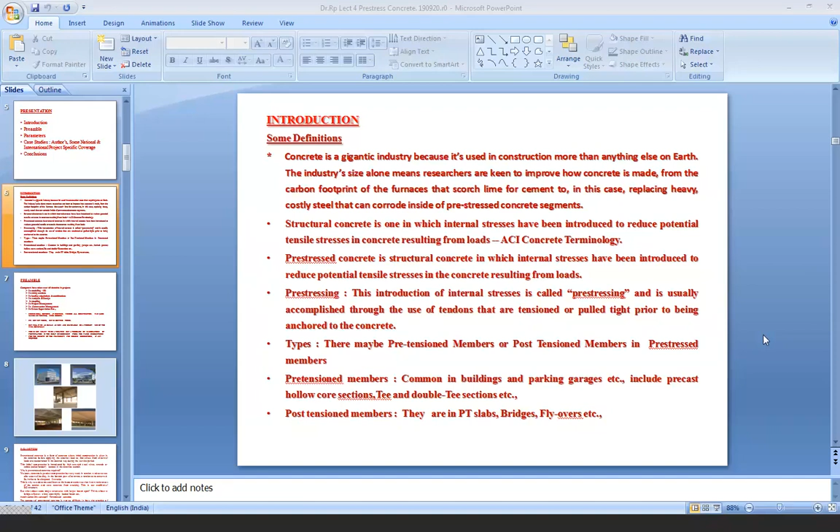Dr. Ramprakash, could you please expand your slide to full screen? Yeah, I tried that. The way it happened is... Sir, please press F5, sir. I know that. Yeah, okay, sorry. I think it's coming on now. Yes, sir.

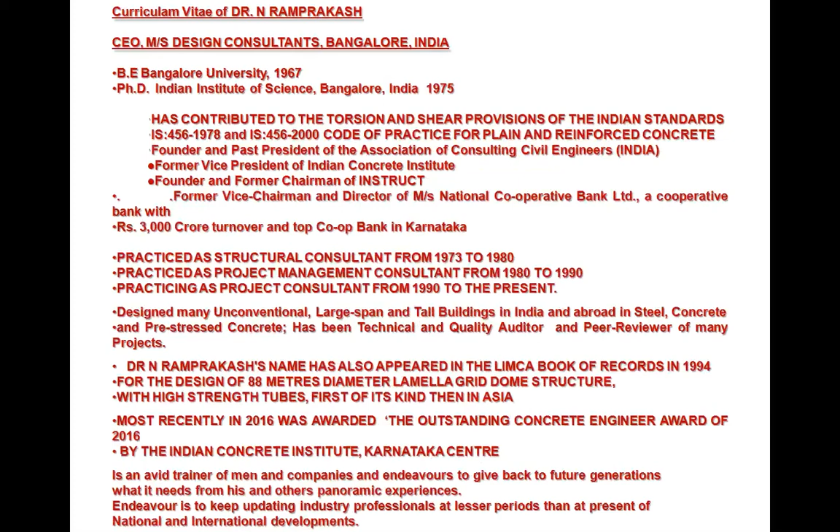Prestressing is an introduction of the internal stresses. The introduction of the internal stresses is called prestressing, and is usually accomplished through the use of tendons that are tensioned or pulled tight prior to being anchored to the concrete.

Different types are there - there may be pre-tension members or post-tension members in prestressed members. Pre-tension members are common in buildings, parking garages, etc., and include precast hollow core sections, T and double T sections, among the pre-tensioned members. In the post-tension members, they are in PT slabs, bridges, flyovers, etc.

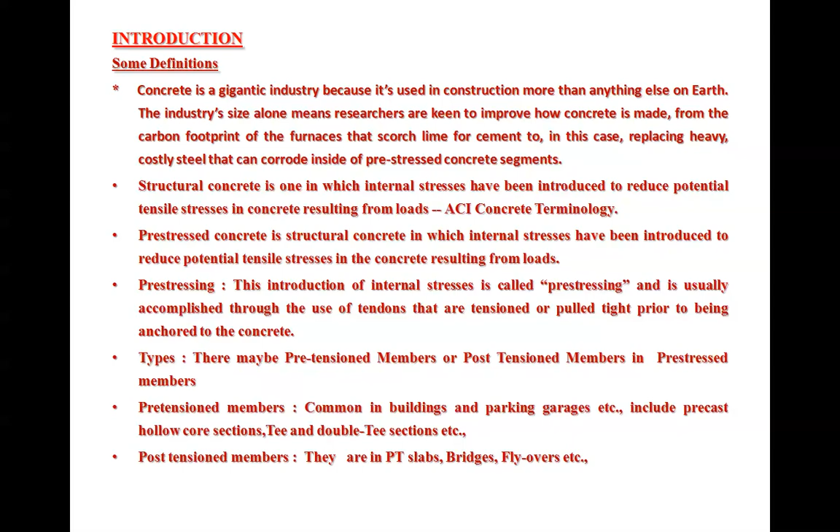I would like to put a preamble to today's presentation. You might have heard this before from me, but I want to repeat it for the new participants today. Computers have taken over domains in projects - in modeling, 3D, in sizing sections, in loading stipulations and combinations, in analysis and design, in detailing, in project management, in construction management, in drone supervision, etc.

I was seeing skill deficits at one time continuously, then wished that all construction was like maybe 3D printing with robots. So this is when I started practice. I was wondering why, because I started off with 3D analysis and design right from the first day I started practice, because I thought all structures are 3D, whether you like it or not. So then I was wondering why the execution is not what can be in a computer.

So, but right now it's not yet there, but it's getting there. So, will it be as human as now and enjoyable, or a product mix of the two, hopefully? Once you have drones and robots, I don't know whether it will be as enjoyable, but it's left to us to make it enjoyable by our creations.

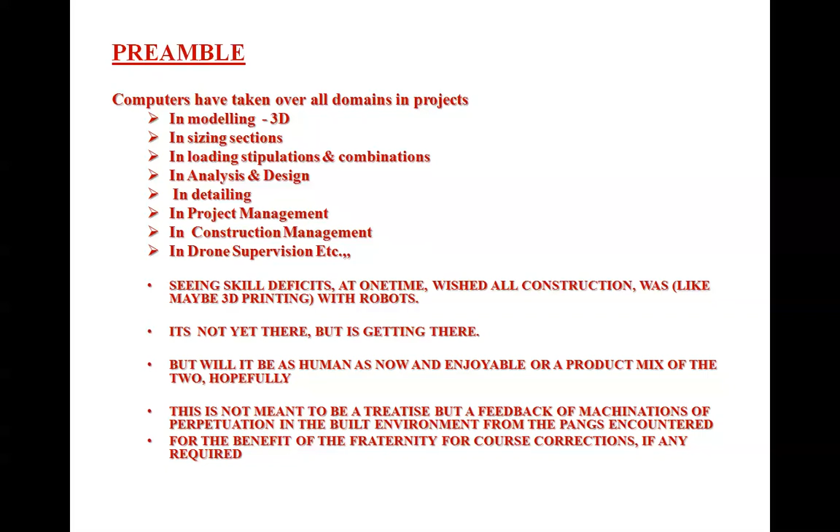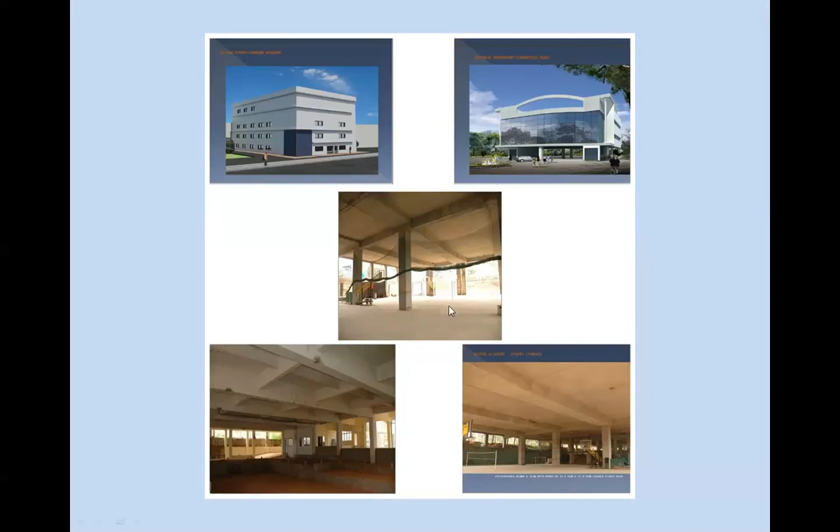I have taken some of the projects which are going to be covered here. This is an industrial building, an industrial project. This is a car showroom with cars stacked on all the floors. This is a double height basement of a sports complex with six tennis courts on top. It's like that. Other than this, I have other projects also.

Now let's see the parameters involved in prestressed concrete. Prestressed concrete is a form of concrete where initial compression is given in the concrete before applying the external load, so that stress from external loads is counteracted in the desired way during the service period. This initial compression is introduced by high-strength steel wires, strands or cables called tendons, located in the concrete section.

Why is prestressed concrete required? We know concrete is good at compression but very weak in tension, and so after external loading, in the bottom part of the concrete, a tension zone occurs, so it tries to be elongated till it cracks. This is why we add some steel bars at the bottom so that it can resist most of the tension and save concrete from cracking. This is our traditional RC structure.

But what about some mega structures with large beam spans? Think about a bridge, a flyover, a long span, highly loaded beam, like what it was in my case for this particular sports complex. Herein comes this concept, the prestressed concrete concept, which stands in very well for this.

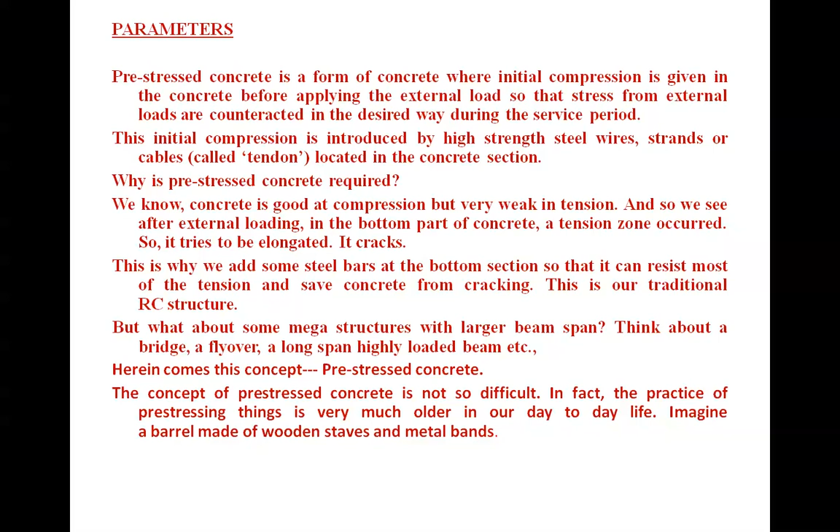The concept of prestressed concrete is not so difficult. In fact, the practice of prestressing things is much older in our day-to-day life. Imagine a barrel made of wooden staves and metal bands. This is the simplest thing you can think of, which relates even to structure.

The basic principle of prestressing was applied to construction perhaps centuries ago, when ropes or metal bands were wound around wooden staves to form a barrel containing some liquid that had to be strengthened, and this was one of the ways of strengthening. When the bands were tightened, they were under tensile prestress, which in turn created compressive prestress between the staves and enabled them to resist hoop tension produced by internal liquid pressure. In other words, the bands and the staves were prestressed before they were subjected to any service loads.

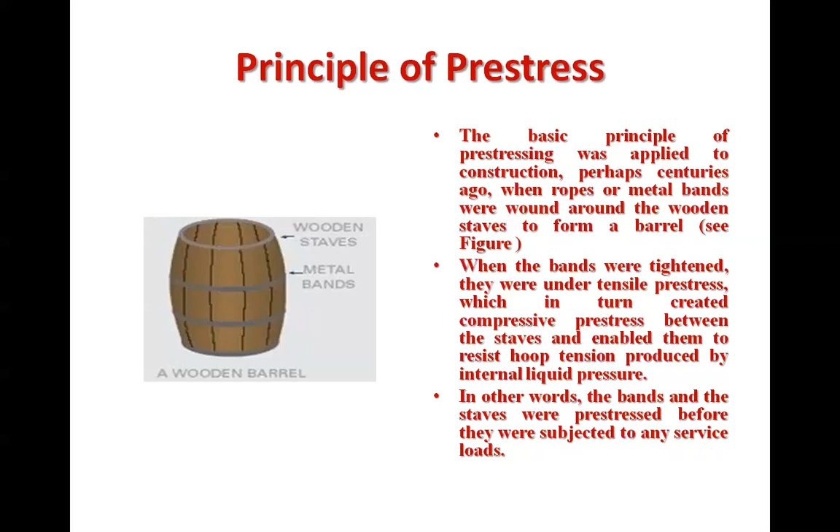Now, if you introduce prestressed concrete, initial compression is given to be balanced by future loading that will create tension. So when you do the prestress, it may camber upwards. Then when the load is applied, it may come into normal position. How does the prestressed concrete work?

High tensile steel wires are inserted into the beam section and they are stretched and anchored, then released. Now the steel tendon wants to gain its original length, and tensile stresses are transformed into compressive stresses in the concrete. That's the beauty of prestress. The whole section can be in compression before any tension is imposed. Now, after loading, there are two kinds of forces in the beams: the internal prestressing forces and the external forces, which are the dead load and live load, etc.

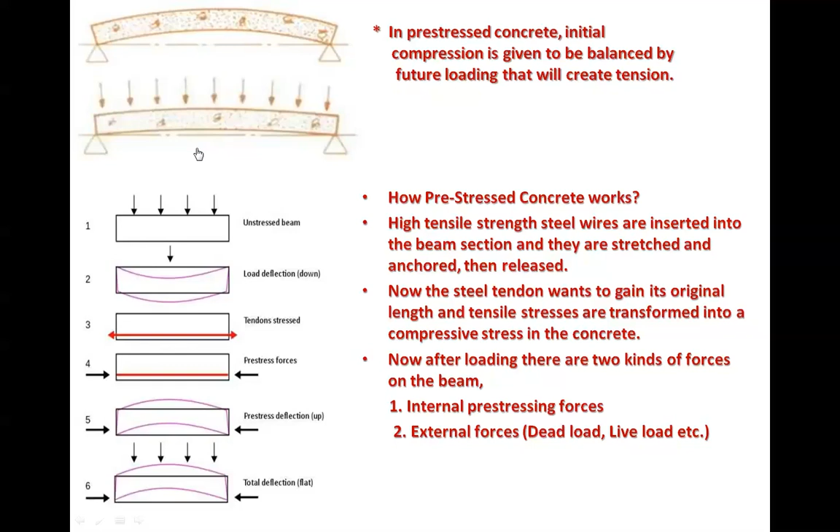So what are the different types of prestressed concrete? According to the construction method, there are three kinds: pre-tension concrete, bonded post-tension concrete, and unbonded post-tension concrete.

In the pre-tension concrete, wires or tendons are tensioned at first and concrete is poured later. It creates a good bondage between the tendon and concrete. As a result, the tendons are protected from corrosion and tensions are transferred directly. Tendons are anchored and stretched, and the stress is transferred to the concrete when it is hard. Then the tendon tries to get back to its original length but is resisted by the bond between it and the concrete. Hence, it induces compressive forces in it.

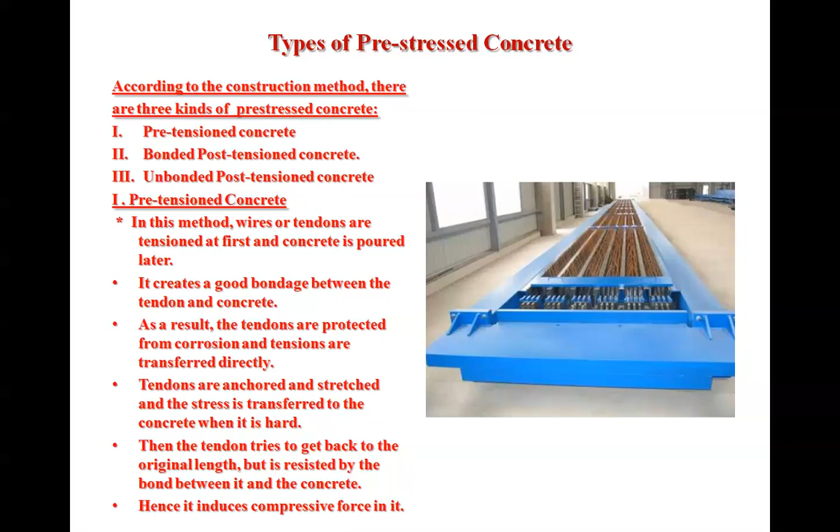The second type is bonded post-tension concrete. Similar processing is applied, but here concrete is poured first, then tendons are tensioned. The tendon is kept inside the concrete and tensioned afterward. Tendons are placed at suitable locations in the member and then casting is done.

That gives you a lot of leeway to design biaxial prestress, triaxial prestress, and things like that, so tendons can run in different directions according to the requirement.

After the concrete becomes hard, the tendons are tensioned by hydraulic jacks against the concrete. Once the tendons have sufficient tension according to design, they are fixed in position. After the jacks are released, the tension remains and transfers pressure to the concrete. This method is widely used in building monolithic slabs for mega house construction projects.

You could see one of the views here.

Next we come to the third type, which is unbonded post-tension concrete. It is unbonded, so it is not bonded to the concrete, which makes it a little different from bonded post-tension concrete. It allows freedom to move the cables

within the interstices that are available. For this, each tendon is coated with grease and covered by plastic. Stress transfer to the concrete is achieved by the cables through anchors.

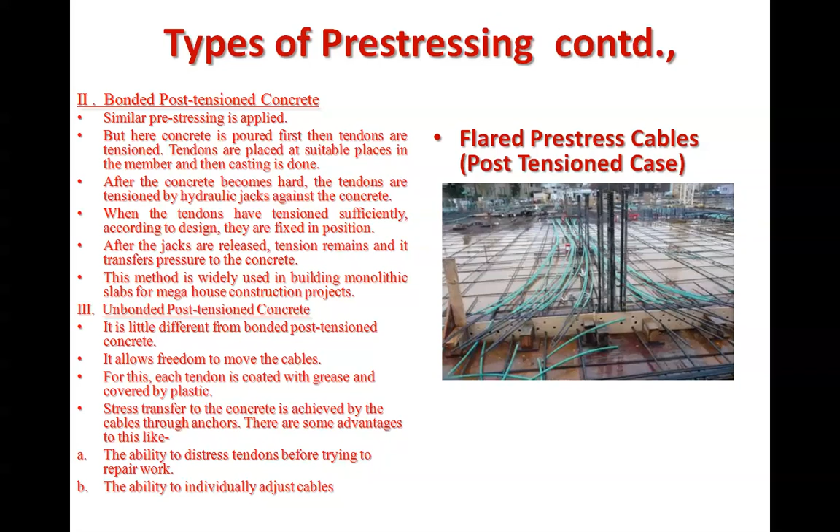There's also the ability to individually adjust the cables. You can adjust the cables according to any pattern required.

What are the advantages and disadvantages of prestressed concrete?

Prestressed concrete is the most durable, reliable, and strongest concrete, widely used for the construction of mega buildings and bridges. I would like to say that when I was in my bachelor's, my dream was to specialize in prestressed concrete, and when I entered my master's, my dream was to continue in prestressed concrete because of this.

We are dealing with a more durable product which is reliable and one of the strongest concretes, because even the concrete strengths are high, and you can go with a large span and things like that. I used to see this in books but never see it around, so I was thinking this is a subject I should pursue.

Prestressed concrete has made significant contributions to the construction industry, the precast manufacturing industry, and the cement industry, because we are also getting high strength concrete, which benefits the cement industry too.

Now, advantages of prestressed concrete: longer span length increases untroubled floor space and parking facilities, as you will have noticed in many car parking facilities, more abroad than in India. Of course, it's also coming up in a big way in India now, with large, very bold spans.

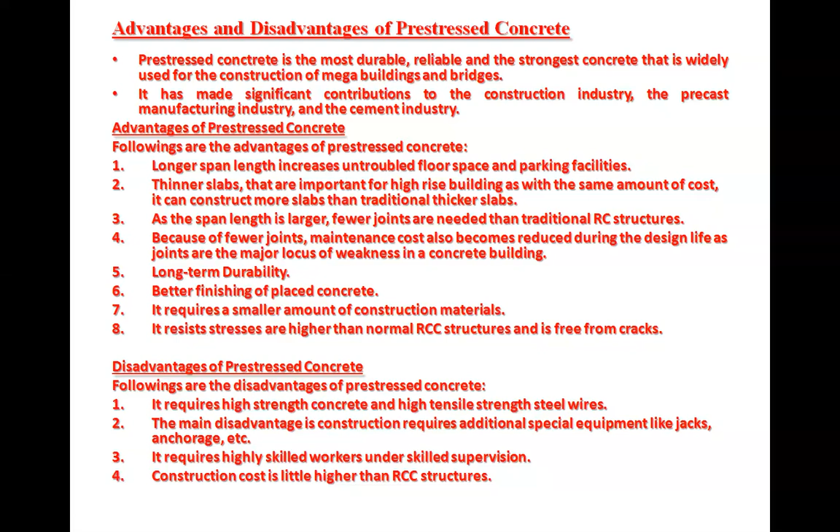Construction cost is a little higher than RC structures. Now, I've got a comment on this also when we come to our case studies. We have this bug in our mind that construction cost is higher and things like that. As I said just now, many times it is wise to make the alternative, even though you have to go the extra mile, to make the alternative and take a call on this particular aspect.

Now, straight away we get into the case studies where I can tell you some of these factors which have to be kept in mind. First, as soon as I finished my bachelor's, I was in a designer's office and I got 2 bridges to be designed. That was the first project that I got. This 2 bridges project was my first prestressed foray after graduation.

Involved in one of these bridges was a protracted debate with the peer reviewers. It always happens that we don't agree with each other very much, more so when dealing with something new or different, as thought of in those days. The peer reviewers had a view that the fixity assumptions of the cross girders were not agreeable to them. They would not want 100% fixity or 0 fixity. Some people assume 0 fixity, some assume 100% fixity. This would not be acceptable to the peer reviewers, obviously, because they have their own views.

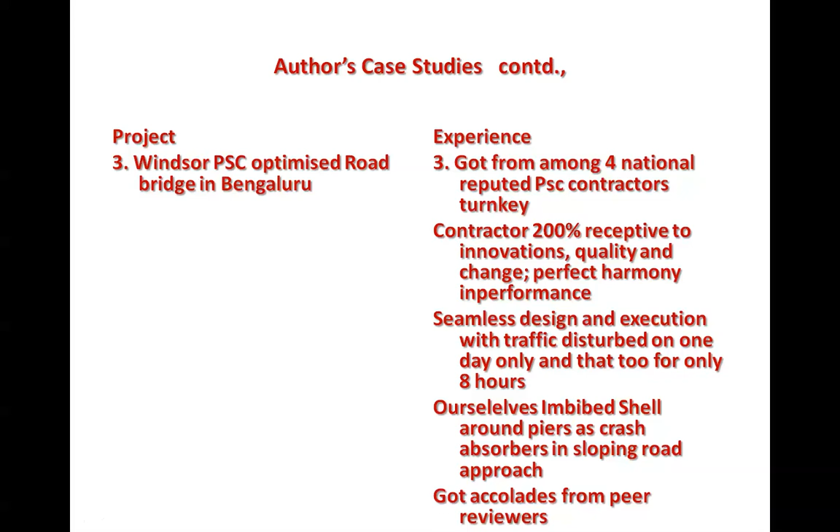The fourth case study is the Alliance Française building. Here we did the building, and we had visitors from France coming once in a while, say once in 3 months or 2 months, looking at our project and overseeing. The French overseers always commented on the large sections and large steel proposed compared to French designs. They immediately said, why are these such large sections of beams and columns, and why so much steel is there on the site.

That intrigued me, and I said, what could this reason be? It immediately occurred to me that the French were using 60 grade steel those days and had prestressed concrete on all members, whereas here it was all reinforced concrete. So obviously it looked different to those people. This was really intriguing to me. I said, I wish I had met these French before I made all the designs. They would have converted everything to prestressed concrete, because that was the period I was in, rather than do the same things like reinforced concrete.

Then we convinced them of the unavailability and prohibitiveness of its use. As many of you know, many a time, as soon as you go to another agency to do the job, especially prestressed concrete, you immediately find that it's prohibitive, it has its own costing, and there will be very few players available to you. In those days, I was told prestressing would have to come from Chennai or Bombay. You get into all these things, and you have to go forward.

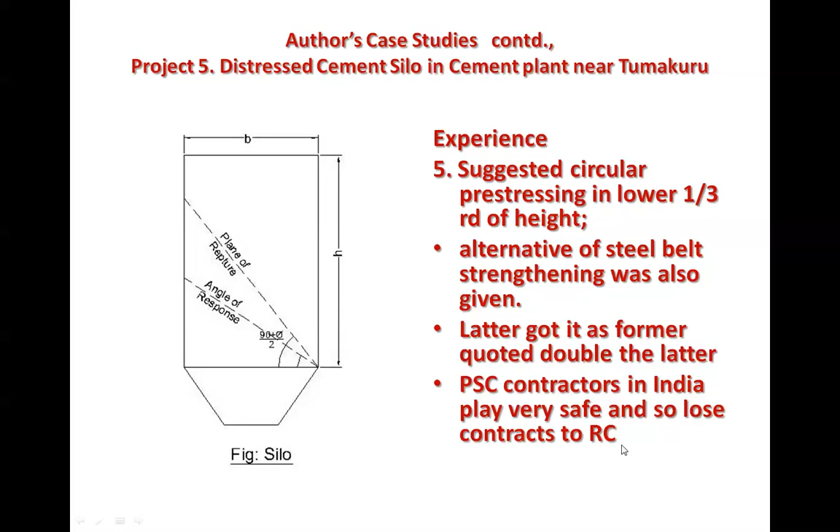Then their execution was like a treatise on prestressed concrete work, with not an iota of comment during execution. What I found in them was that they were not only good on the project workout, but they were also good at execution. They were very, very apt in all aspects of execution, because in prestressed concrete, execution is very important, supervision of execution also. So I salute the French and prestressed concrete after this experience, which was like the pinnacle of execution. They have advanced to such an extent.

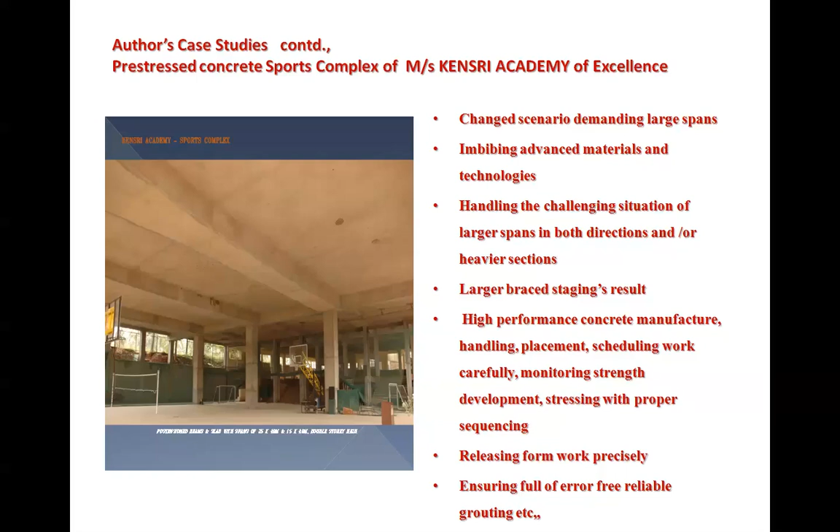Change in scenario demanded large spans, imbibing advanced materials and technologies, handling the challenging situation of larger spans in both directions and heavier sections, larger braced staging, high performance concrete manufacture, handling, placement and scheduling. Monitoring strength development, stressing with proper sequencing, and releasing formwork precisely in the right sequence are key factors, along with ensuring error-free, reliable grouting.

So the synopsis of design for this project: post-tension beams and slab, with spans of 25 by 40 meters and 15 by 40 meters, double-story high. PT beams were flared at the ends to accommodate anchorages. You can see that in the next slide.

You can see the flares at the ends of the beams. I flared the beams at the ends to accommodate the anchorages, otherwise the prestressed cables would be jumbled up there.

The RC column-free waffle slab. There was a portion which was an RC slab which had a swimming pool, so we put an RC waffle slab there. Six tennis courts were on top, and we used fiber reinforced concrete for the tennis court.

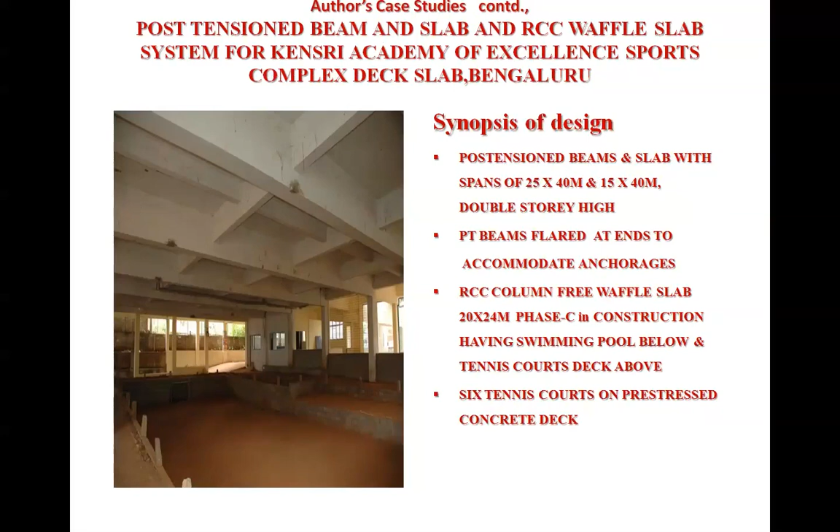So the innovation taglines for this project are: large spans bridged with novel flared beams, and fiber reinforced concrete used for the exposed tennis court, as the tennis court deck was exposed to weather.

This has been useful to double up as a column-free congregation area during assembly requirements. The offshoot was that because of prestressing and large spans, this could develop as something else. Pile foundations were imbibed to reduce unequal settlement problems. This is a key factor when you are talking about large spans, so keep this in mind.

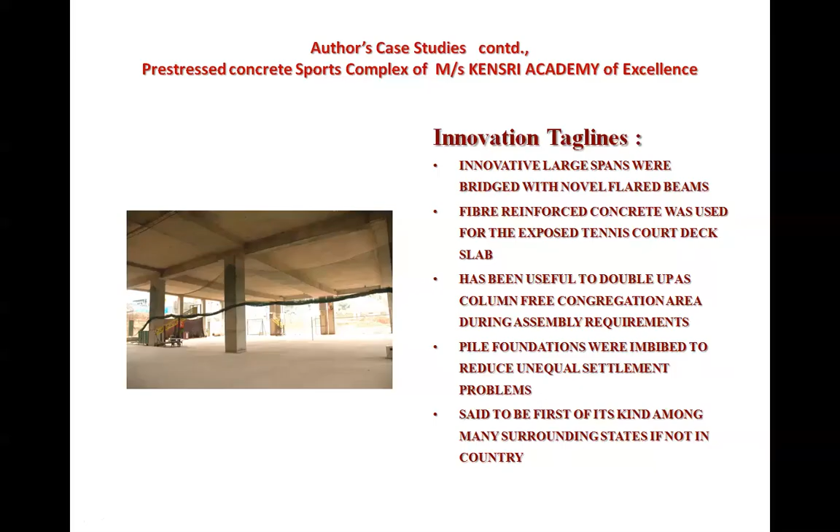This was said to be the first of its kind among many surrounding states, if not in the country. We kept asking people whether they had done prestressing of this kind somewhere. But in the same complex, we had an auditorium which was 60 feet by 40 feet, or 18.3 by 12.2 meters.

And I proposed a PT slab for it because it was an auditorium. The proprietary company gave a design with 2 beams made out of prestressed cables to result in 3 one-way slab panels, to reduce slab thickness for lower headroom requirements in the libraries below. So 2 beams were involved in the 60 feet direction so that this could be a one-way slab.

Drawings were vetted for execution, everything was spick and span. All the drawings and designs were peer reviewed by us and were all ready. Then my assistant, who was dealing with the project, was shocked when prestressing was being carried out in circular fashion along the periphery, rather than in the sequence finalized and put in the drawing.

He went when the prestressing was going to be done, to see what it was and whether everything was suitable. He found the prestressing people starting from one corner and going around, prestressing around the periphery. When asked, they said, this is what we do everywhere.

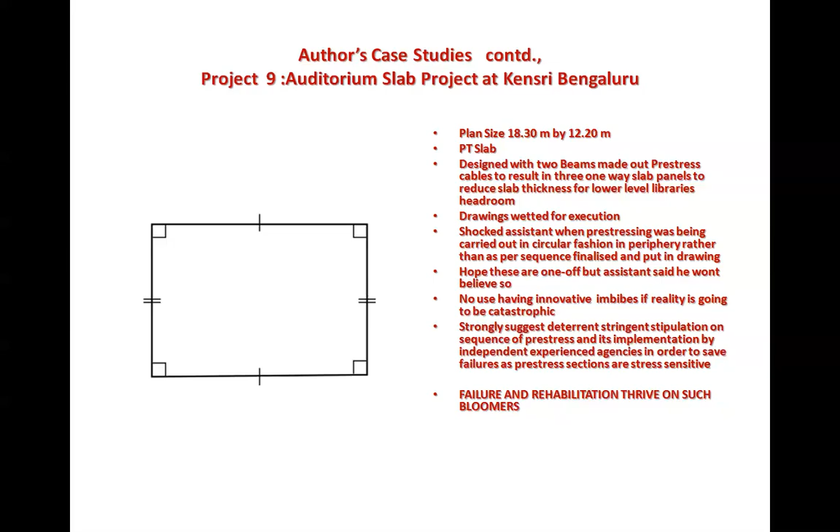So I've gotten into a lot of rehabilitation and failures, and all these happen because of all these backgrounds. What are the skill deficits found from all these case studies?

Stressing is a very important factor, and very few persons are involved during stressing. Their level of knowledge is also not adequate. Sequence of stressing only in drawings was noted. Mechanic was caught stressing around the periphery. Lunch breaks, other breaks, end of day left to chance during stressing, not recording it.

This sort of thing is not done in prestressed concrete. Any concrete issue is overlooked, but never in prestressed concrete. Very few persons are trained for all this. Work is left to uneducated mechanics without appurtenant supervisors to keep spying on their work continuously. They don't have the practice of recording actions with respect to time, stressing values, etc.

The supervisor is supposed to record all those things during every stressing operation and show it to the next level for approval. Prestressing is a fab system, but it needs care. So you can see where the lacuna is in whatever you need to do.

When something new comes along, this is not new, but even this is too much. Too much interference and supervision is the need of the hour, with independent companies overseeing stressing and systematic grouting and recording. The need of the hour is to have independent supervisors or companies who look into those things.

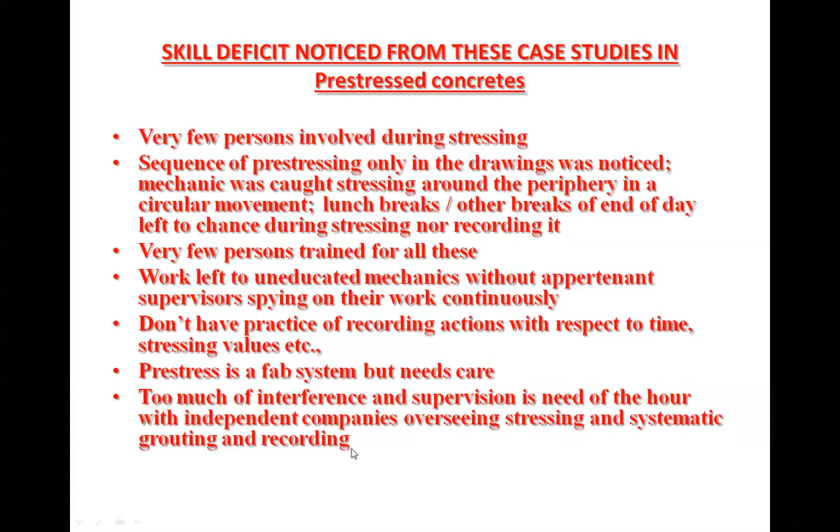Now I come to some buildings with heavy duty loadings and things like that, PT slabs. This was one of them. We made an optimized, economical 3D design with PT slabs. This was a high bay stores complex with racks - storage racks were 8 meters high. So the loadings were very large. It was a traveling rack.

I strongly suggested pile foundations, but it was vetoed, as there is a taboo by many in the fraternity that piles are costly and should be avoided. So when I suggested that because of the PT slab, large span, and the differential settlement, it should be only piles.

The thing is, pile is a buzzword, a dirty word in construction. As soon as you say pile, they don't want you. They want you out of the project, or they want you away from the project. So this is funny - I just said, okay, then we'll have a raft, and we'll do a raft.

Net result: a 6 month project got delayed by 2 months as a maze of service cables crisscrossed the area, and no shutdowns were given so easily. So whenever you think of something, somebody plugs it down and then the project suffers. All I said was, you said so, you suffer. That's it, nothing for me. So they suffered the 2 month delay.

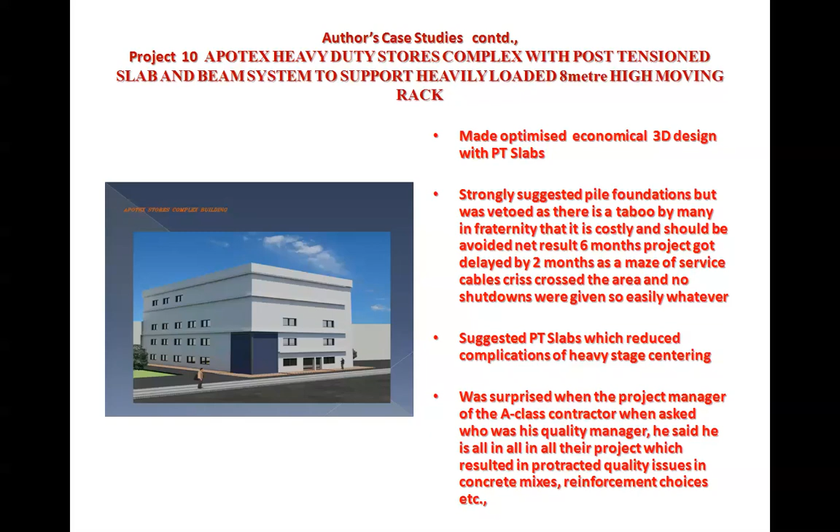Then we had an industrial production building in the same complex. The building had a column-free production hall in 3 upper floors. The bay size was 20 meters by 15 meters. Loading, among others, was 7 turbo generators, 12 tons each, on every floor.

Said to be a top contractor, the one chosen was lax in quality planning and execution for multiple items. Even if it is A-class, don't be sure that everything will be A-class. Then we had to keep pulling them up, come to it.

Finally, for the PT slab first roof, M35 concrete was stipulated, but they gave M33.2 and 33.8, in spite of sourcing RMC from a very big branded company. So it's no use saying that I am buying from X, Y, Z branded company, so the concrete is superior. This was a classic case of that, which was pointed out as not acceptable as per IS.

So I turned around and said, this is not as per IS. So the RMC has to explain how they can send out concrete which is not as per IS. And then they wanted a copy of the IS. When I said this, I even sent it - I had the patience to send it. I requested the next slabs to be sourced as M40. Obviously, you end up designing for bad construction if you go on like this.

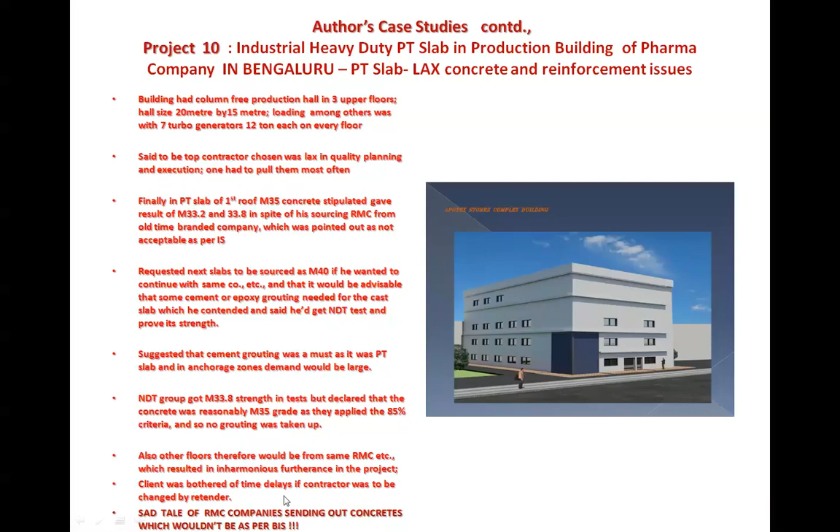This was a car... next was a car showroom with 2 floors in Chennai. With 2 floors, I put in a PT slab. So this is one of them. I will skip this for lack of time. But for this PT slab, the point is...

Add to these the minuscule contact surface areas of the vehicle tires. So when I browsed through all the cables, my assistants had measured the cable profile, and they were not accurate at all. They were counting in inches where we were talking in millimeters for the profile. So we had to pull them up. It was a very sad tale with respect to execution, more so when you have a vehicle moving on it, with tire contact pressures very large.

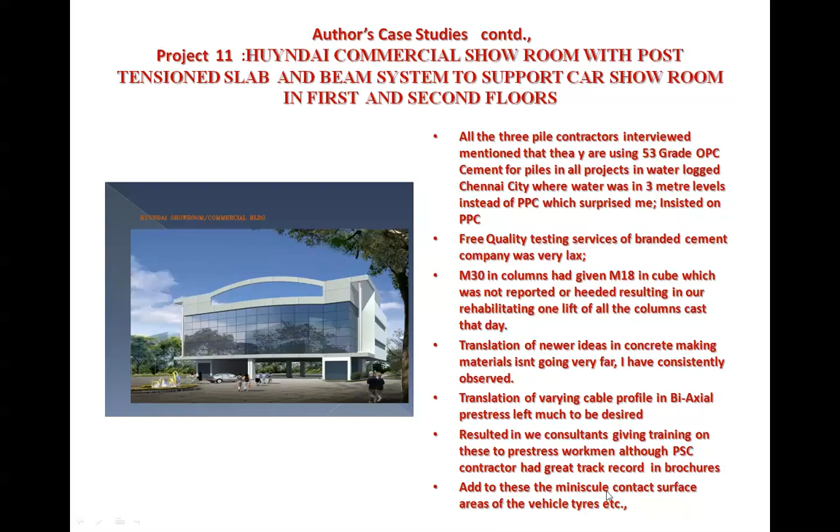Okay, I had a flyover design, and we did the prestressed concrete flyover for BBMP. We prepared all the things, and 5 national tenderers took part. We were L1, and we had a very sad pre-bid meeting where the concerned people were laughing at some of the questions without even seeing what the tender was telling them. Because in the milestones, the design check time was also involved.

So when we asked how much time they were going to take to get the designs checked, they asked why we were asking about design checking. Then when we said the force majeure clause was left out, they said, why do you need a force majeure clause, we are not going to have a war. And things like that. So finally, they had a spite on us, and somewhere we were disqualified without a hearing. They took the easy way out by using their authority to disqualify us. L2 withdrew his tender without reason, and the whole tender was shelved. The city lost a vital link due to such an arbitrary approach.

This was a vital link between Town Hall in Bangalore and Hudson Circle. This was the project, and I had put together a great team of persons, including transportation and everything. Personnel at the helm, and those in authority, have to show better knowledge, tender management, transparency, and seriousness of purpose, due to lack of which the city and country should not suffer. Finally, the city has suffered. We don't have the flyover even today.

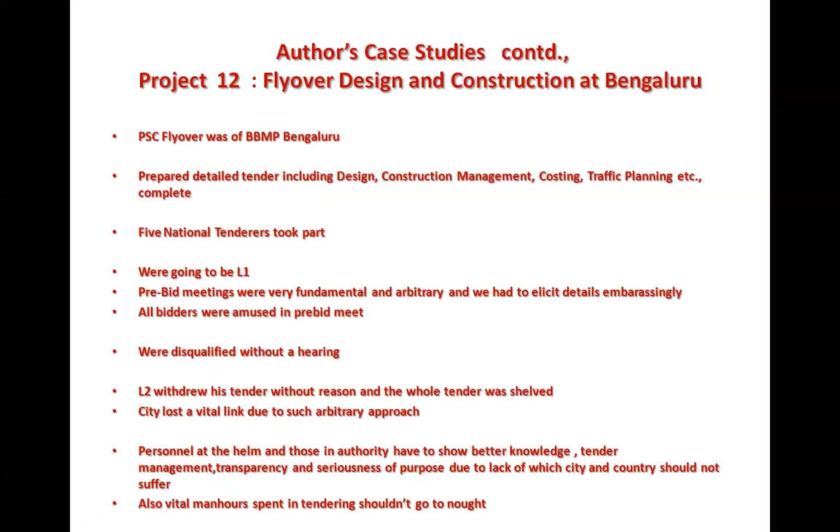Okay, now I'll come to a few. I think I'll need another 10 or 15 minutes. I'll just go through some of the case studies in the national sphere.

One is the Sirsi Circle flyover. It's the best of international standards brought into Bangalore. I think this was somewhere abroad, such a flyover. I think it's not a flyover abroad, I think it is a causeway. But great, this is really the great thing to talk about back home in India. The aesthetics were wonderfully imbibed. Construction was of the best quality in standards and quality, putting India on the international map.

It was a winding road, and all the engineers should go and see how they solved all those things - the camber in a winding road, the casting on those particular things. It was really a saluting performance.

Bad management and dealing of the local authorities derailed the project halfway. The project didn't go fully - it stopped at the town hall. Otherwise, it was supposed to go up to Hudson Circle. So you lose important, innovative people if you have bad management and dealing. Responsibility should be fixed for bad handling by the client of the professionals.

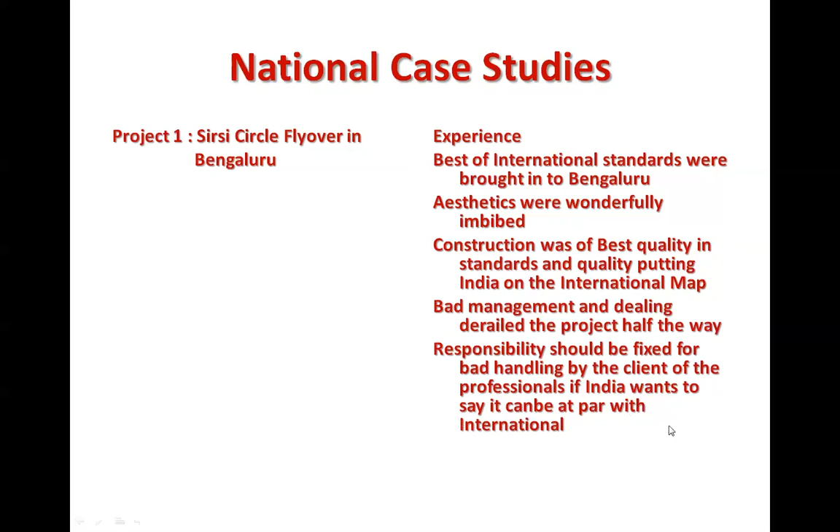If India wants to say it can be at par with international standards, it's easy to say we're all at par with international, but we have to show it in action, show it in figures.

Now the next case study I came across was when I went to Bombay and saw 55 flyovers. One of my partners was doing some flyovers in Bombay also. So they built 55 flyovers in 3 years. This is a sort of a record which every engineer should go into. I went into it in depth - I know everything about this particular thing.

And I went and met the chief minister in Bangalore, Karnataka, telling him about this, that we should be doing this. I don't want to tell you the experience.

MSRDC project handling was impeccable and firm, the most comprehensive, practical, and effective in quality, system concept, and technology. Hats off to them. Tender documentation and implementation was made most simple and forthright. Must be taken as a shining example for all other flyovers to emulate and extend. This is one of the things I found. We have to throw up accolades on people who do such jobs, people who think this way. This is equal to any international foray - it is not only national.

Finally, in the national case studies, what I found is similarly in nuclear power plants, all facets of prestressed concrete are put to test, and hence enormous quality standards, system concepts, and fail-safe methods have been tested and incorporated. So also in the Department of Space, each in its own way, because everything has to perform in these places. Great opportunity exists for challenging youngsters of today to show their mettle. In each of these organizations, I found the youngsters are involved with all the discussions, concepts, and visions. So there may be somebody who throws up some nuances.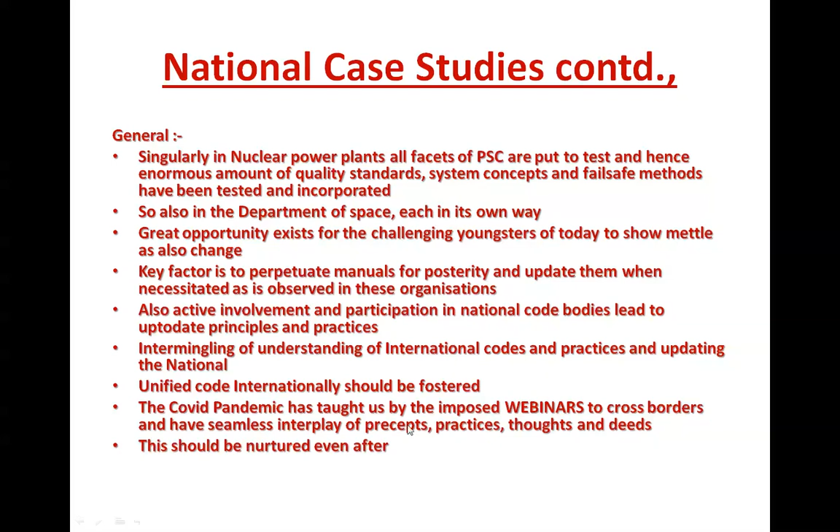So some visions or case studies from abroad which I came across - whenever I say to any client, I say whatever can be done anywhere in the world can be done in India. I want to satisfy myself that I'm saying the right thing.

And when we see projects like this - imagine this is a catenary, and these are all prestressed. So imagine all the machinery. We are talking about a few beams and flyovers and things like that, but imagine you are given this project. I would wish hypothetically to work on such a project.

Catenary concept with inclined columns is very futuristic and challenging, no doubt about it. It's rare to have a catenary profile in a shell. The effects of creep, elastic shortening, shrinkage, etc. are very critical. This is a one-of-a-kind project in the world.

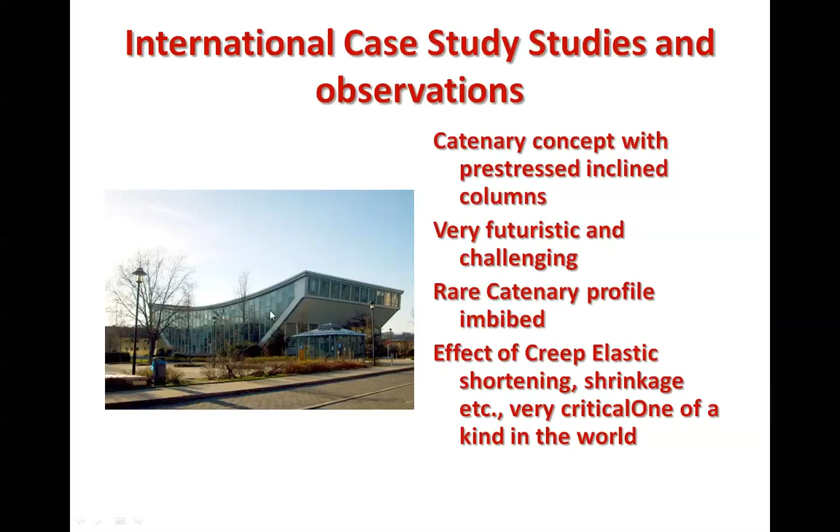Then in Singapore, I found that in multi-story buildings, they have different prestressed elements embedded in them. Many such buildings have temporary stay cables for effects during construction. In prestressing, stages of prestressing and stages of loading also come into play. They have temporary stay cables and idle cables, and progressive stressing of cables is also resorted to—they don't stress everything in one go. This is progressive stressing in a building. Sometimes cables are removed at the end of construction once they've served their purpose in the interim conditions. Note all such imbibements for newer achievements.

If you want to imbibe prestressed concrete, I think you should do that.

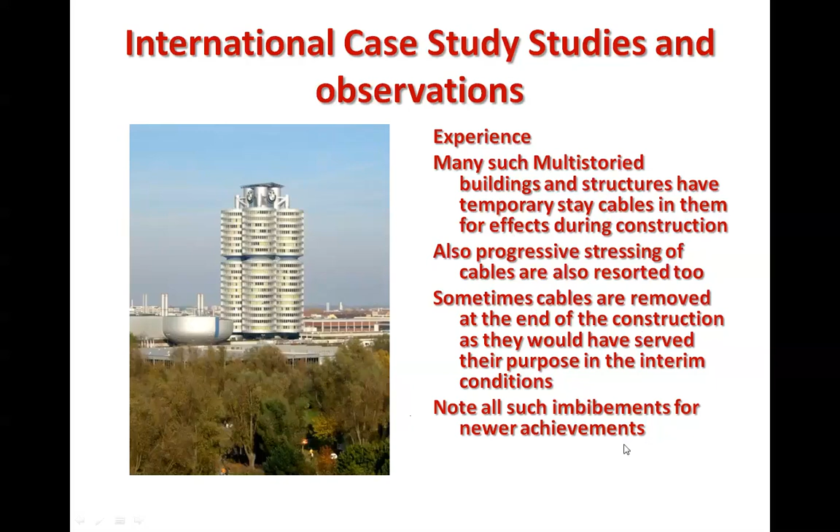Another great thing I had ventured into in Bangalore was a hyperbolic paraboloid shell roof on 2 columns, which didn't come up. But I see this particular thing and imagine that one day I wish I had done this—a hyperbolic paraboloid on 2 columns. They are built easily all over, and I see this repeated in many places in the world.

Large issues in prestressed concrete members are controlled impeccably—these are all prestressed. Aerodynamic effects are sorted out with wind tunnel tests; very easily they go to wind tunnel tests. Many times research institutions are on line with consultants and contractors. There is seamless integration of many domains like mechanical, aerodynamics, services, material technology—new and innovative forays are the order of the day.

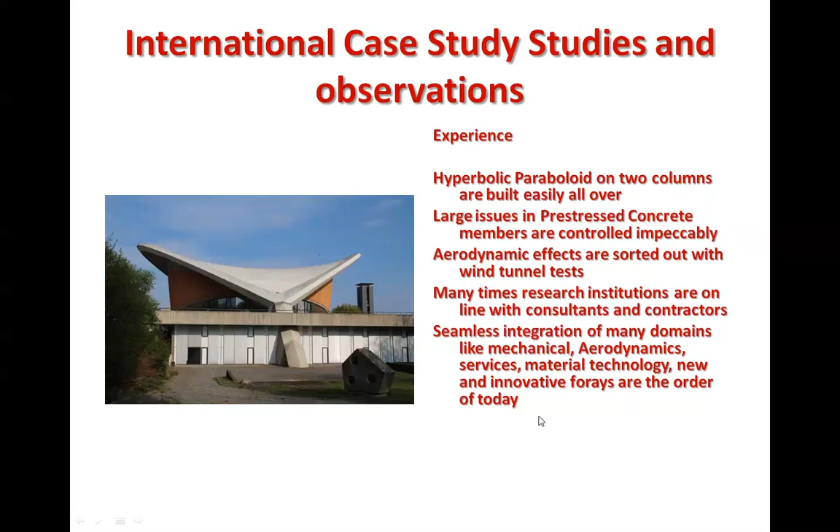So in conclusion, I wish to say that unless we have a sea change in our approach, prestressed concrete will not have its pride of place in India. We must encourage the young and innovative to try out prestressed concrete more freely so that affordable solutions spread everywhere it should. If you put prestressed concrete where it should be, I think you would have done your job. But you should think more of doing more. Even if cost is the same, change needs the change.

I feel all of us have a say to purport change, so new inventions take us to the next level time and again. If you don't think of changes and imbibe them, development is going to go backwards rather than forward. The European model way of nuances every day has taken them to new pastures of incorporation. The other day I saw a windmill developed in Europe which is horizontal and not vertical, and it has half the diameter and half the height. It's incredible what's going on—it's all because of nuances every day.

Quality systems should be prima donna in the industry—there's no two thoughts on this, particularly when you enter domains like research. Integration of all stakeholders is needed to put PSC in the place it should be in. All of us keep trying to see where we can put prestressed concrete. We have many entrepreneurs who start and then close because of our attitude. We should be able to convince people that even if it costs the same, we should go for prestressed. That's the thought it should be.